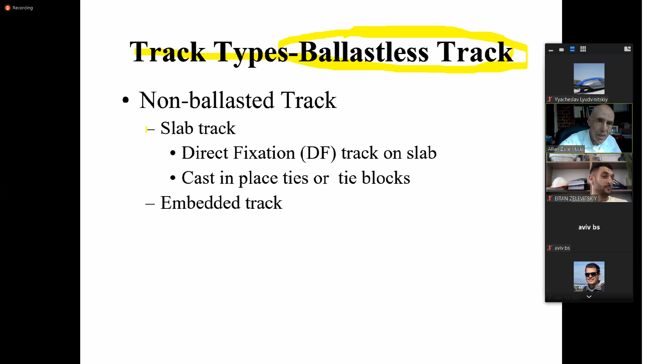The two major types of non-ballasted track are, in general, called slab track and embedded track. Slab track is usually made out of concrete slabs, either cast in place or continuously cast or precast and brought in. Embedded track is track that's laid usually in the street. All you have to do is go to Jerusalem and walk down Rehov Yafo, and you'll see lots and lots of embedded track. That's track that's built into the street itself.

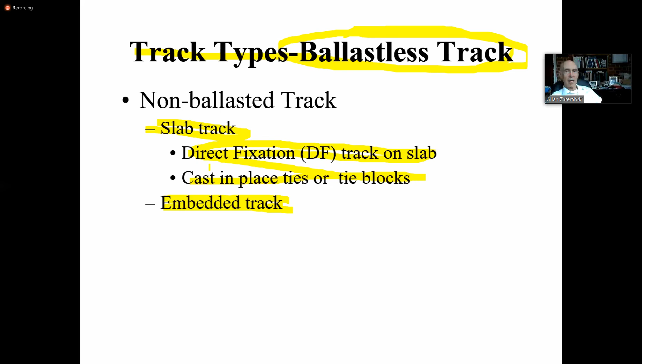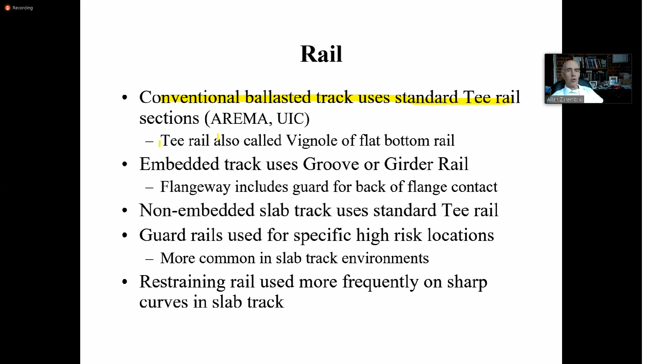Slab track can be further divided into what we call direct fixation track on slab and cast-in-place ties or tie blocks. And we'll talk about each of these in turn. So let's start off with the rail. Conventional ballasted track uses a standard T-rail section, which is also called a Vignoles or flat bottom rail. So Vignoles rail, flat bottom rail, T-rail, that's our standard rail section. That's self-supporting, has a stable base, has a single large head, and has a fairly significant bending moment of inertia.

Embedded track does use T-rail, and I will show you some embedded track that does, but they also use groove or girder rail, and you'll see both terms used. I'll show you a few more examples in a minute. The advantage of groove or girder rail is it comes with its own flangeway. The flangeway has a guard for back of wheel flange contact, so it doesn't go riding onto the street where embedded track lies.

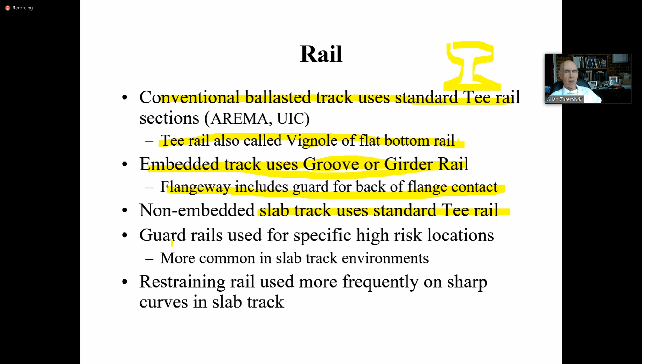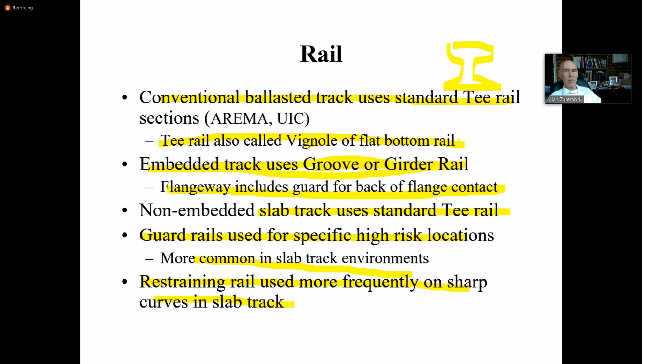Slab tracks always use T-rail. You really will not see groove or girder rail in slab track. In fact, the only place you're really going to see groove or girder rail is in embedded track. Guardrails and restraining rails, we've already spent some time talking about. You tend to see a lot of guardrails in slab track environments, and restraining rail in very sharp curves in slab track.

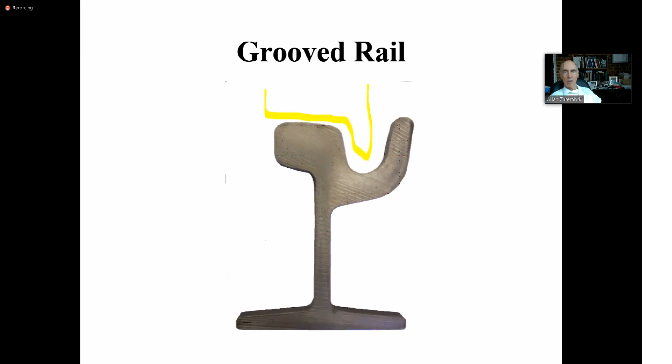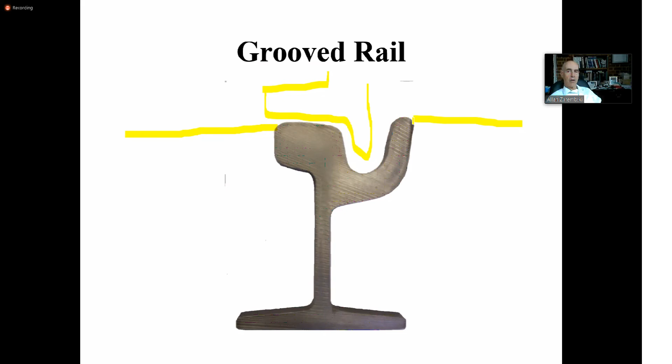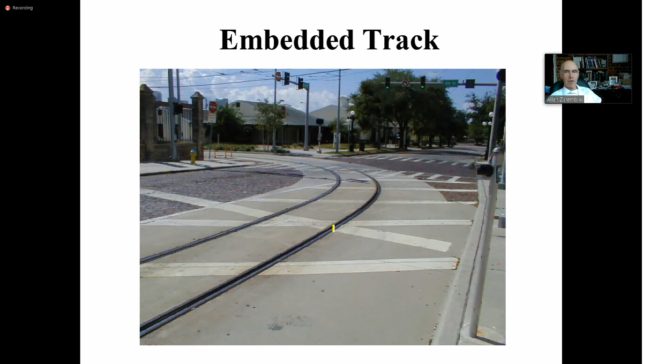So again, just as a reminder, this is a groove rail where the wheel sits there. This is most commonly used in embedded track of some form, where you can run the pavement of the street, be it paving blocks or asphalt or cement or whatever it is, to the back of the guard here and to the rail here. I've shown you pictures in the past of embedded track. These are fairly classical types of embedded track structures.

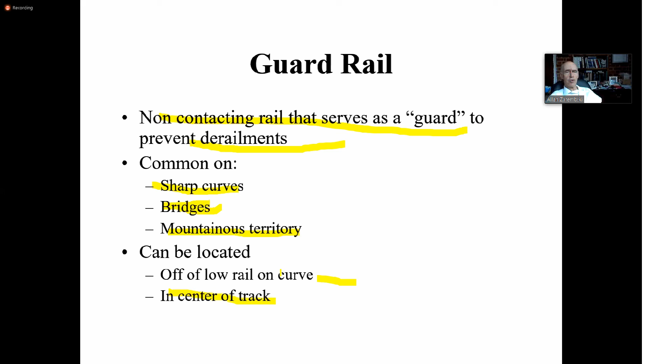You see them on sharp curves. You'll see them in mountainous territory. And more commonly, you see it located in the center of the track. Sometimes you'll see it off of the low side of the curve, in non-contact mode, but mostly you'll see it in the center of the track.

So restraining rail, again, is designed to be in contact with the wheel on the low side back here. We see it most commonly in transit tracks. I really haven't seen restraining rail in any serious major application on railway track, but where I see them is on metros, where you have very, very sharp curves, and that's where they're common.

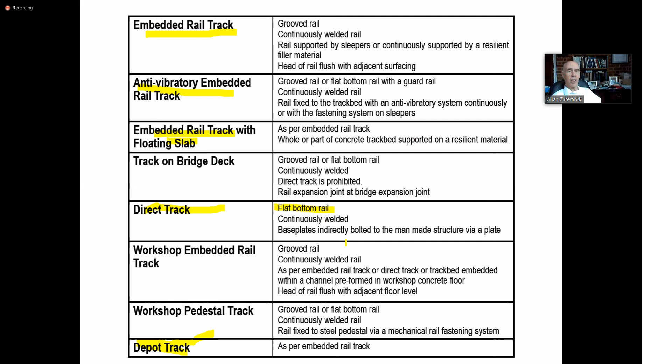In an embedded track, sorry, let me go back. In an embedded track, you actually get a little bit of that effect from the outside portion of the railhead, the guard portion of the railhead. So that actually can function as a form of restraining rail in very sharp curves, even though most of the time it's not in contact.

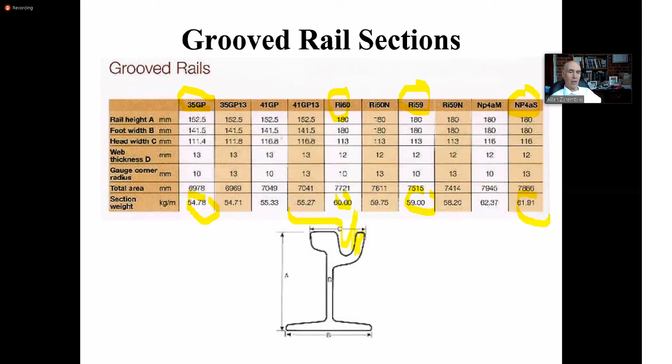In fact, you've got to be very careful with embedded track that you don't have excessive wear out here, because you have a very thin section. And if you have excessive wear in this portion of the girder rail, of the grooved rail, you can have yourself a little bit of a problem.

So as I indicated, it splits the lateral force between the outside and inside. It also introduces new wheel wear, because now you have wear on the outside of the wheel flange. So all of a sudden, now you're getting wear in this portion of the wheel flange as well, where normally you don't see wear. So you have to be really careful about getting excessive wear. Now you have wear on this side of the flange and on this side of the flange, and you can very quickly have excessive wheel flange wear.

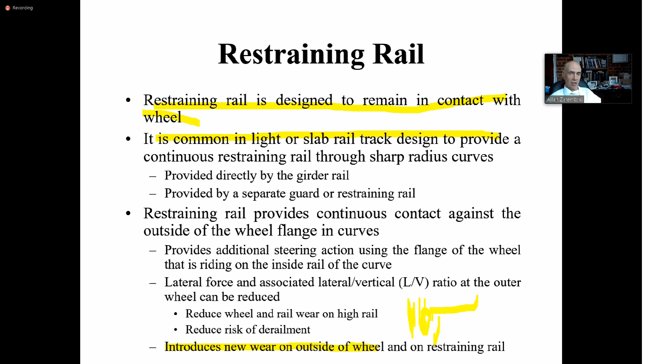And in general, in metros, thin flange is the most common reason for replacing wheels. When this flange gets excessively thin, below the allowable wheel standards, that's a major reason for either replacing or truing, machining the wheels to get a new profile back.

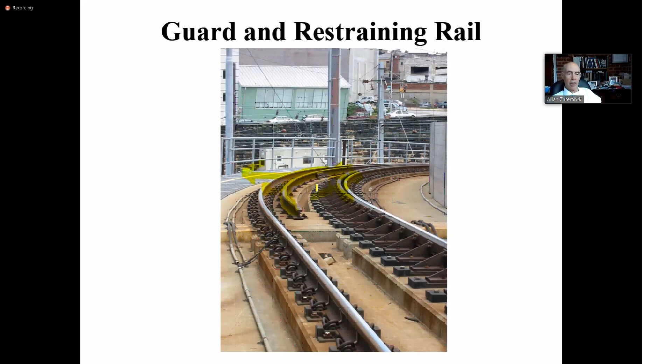Restraining rails come in various different designs. In this particular case, you actually have a modified running rail with braces holding it in place. Another design that you will see is a design such as this. Oops, sorry. This is my restraining rail. And again, you can see the concern about very high lateral forces. You can see how strong these braces are. And again, that's really a function of the concern about the level of lateral load.

So again, what we're looking at is the wheel sitting in here, and the back of the wheel coming up against the restraining rail.

Can I ask a question? Yes. About the distance between the restraining rail and the rail. You told me to see how I can calculate it in TCRP, and I didn't find it. Do you have any other source where I can find how to calculate it? Yeah, let me find another reference. I thought there were a couple of references in what I sent you. So let me get back to some references for you. Thank you.

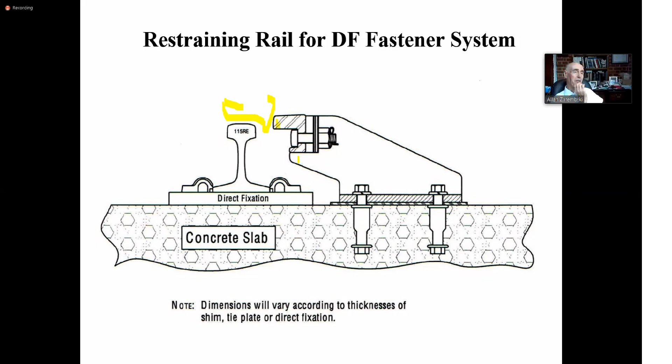Rena, if for some reason I forget, send me a gentle reminder. I'll try to remember. Because there's a lot of argument between the American engineers and European engineers about this distance. Yes. Yeah, there is some difference of opinion on how to do that. I agree.

Okay, so restraining rail is, as I said, used for very sharp curves. Standards differ, so you'll see different metros have different standards. I've seen standards for restraining rail for radii sharper than 365 meters, going down to very sharp radii less than 90 meters. So it really depends on the standards of the metro that you're working with. I think it's most common in the less than 200 meter radius range, but as I said, I've seen standards as much as 365 meters.

If the wheel flanges are relatively short, I've seen more application of restraining rail for short wheel flanges, because you have more protection against the wheel popping out when you have a large restraining rail in the background here.

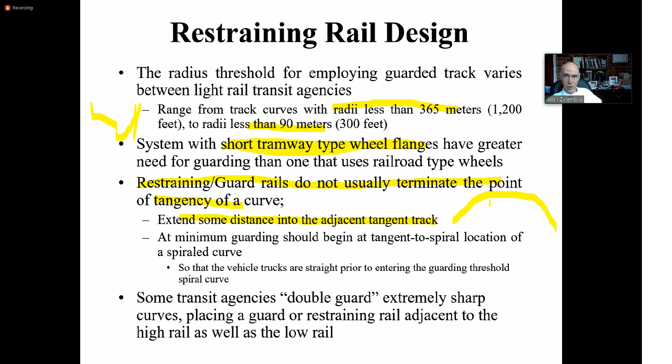Restraining rails usually go past the point of tangency and into an adjacent tangent track. So if you have a tangent spiral curve, we see restraining rail coming into the tangent as well. It just doesn't stop right there. And the reason for that is, as I've explained before, the transitions are actually where you see the largest lateral forces. So if you just focus on the body of the curve for your restraining rail, you can miss the worst case forces coming into or coming out of the transition between the tangent and the curve. So it's fairly common practice to run a restraining rail out into the adjacent track.

At the absolute minimum, to the tangent to spiral point. Going in is not so much of a problem, because nothing really starts happening until you go into the spiral. But coming out of the spiral is where you have some concerns, because if the bogie is rotated coming out of the spiral, it may need a little bit of tangent to straighten out, which means you can get some very high lateral forces even at the tangent on the outside of the transition. And so that's one of the reasons why you carry it into the tangent track.

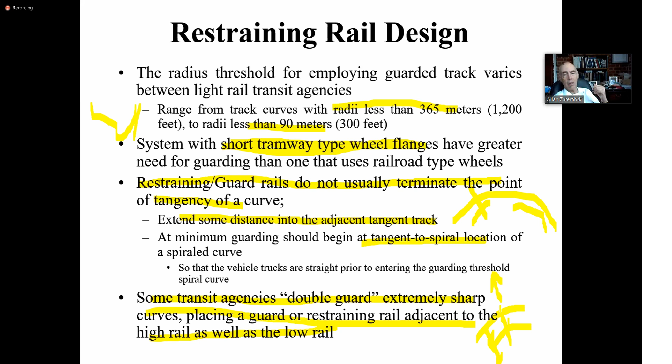So with very sharp curves, let's say less than 100-meter radius or something like that, I know of some transit agencies that put guards on both sides. I'm not that enthusiastic about that, but I do know you'll see that practice, and you'll see that in some standards.

Okay. So now let's go right into the track. I'm going to start off by talking about direct fixation track. Direct fixation track, which is the most common type of ballastless track worldwide, is a track structure where the rail is mounted on direct fixation fasteners that are attached to a concrete deck, slab, or invert.

And this is pretty much the standard method of construction for tracks on tunnels and aerial structures. And in fact, even in conventional railroads, we see a lot of this direct fixation track in tunnels, because if you want to put a deep ballast layer in a tunnel, you need a larger diameter tunnel, which gets to be very expensive from a construction point of view. So a slab track, a direct fixation track, usually requires a smaller diameter tunnel than does a ballasted track.

You'll also see some at-grade tracks. So, for example, the Chinese use a lot of direct fixation track on their high-speed rail. On the very high-speed lines, 350 kilometer per hour railroads, they do use a lot of this direct fixation track.

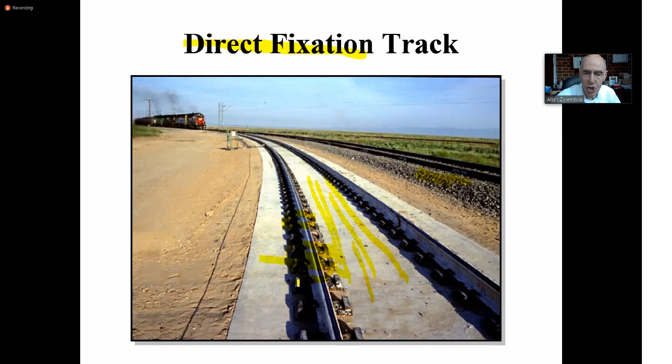I have been involved in the maintenance of direct fixation track often enough to know that components fail or degrade, and sooner or later you have to do adjustments. And so again, because we don't have adjustments in the slab, all my geometry adjustments go into my fastening system. And again, I'll show you that in a couple of minutes as well.

Here's another type of direct fixation track. Here again, you have a concrete slab with plinths put on top of it. We'll talk about all these designs in a few moments. And again, you can see the direct fixation fastener here. You can tell already this is a much more complex system than you have in a concrete sleeper or a wooden sleeper. And even though many of the clips are exactly the same, the rest of the system is much more expensive.

To put this in perspective, if you look at the cost of direct fixation fastening systems, they can be of the order of $100 to $200 per fastener.

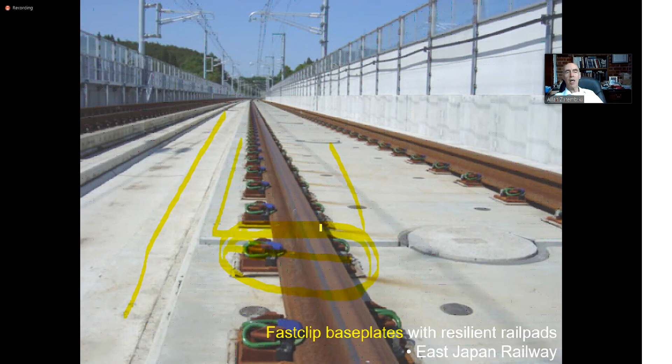Whereas the fastening systems for a concrete sleeper maybe runs $20, $25, and the fastening system for a wood sleeper maybe runs $10, $15 per fastener per side. The cost of a direct fixation fastening system is about $100 to $200 because of all that extra functionality that has to be built into that fastener, because there's nowhere else to put it, because you can't put it in the slab.

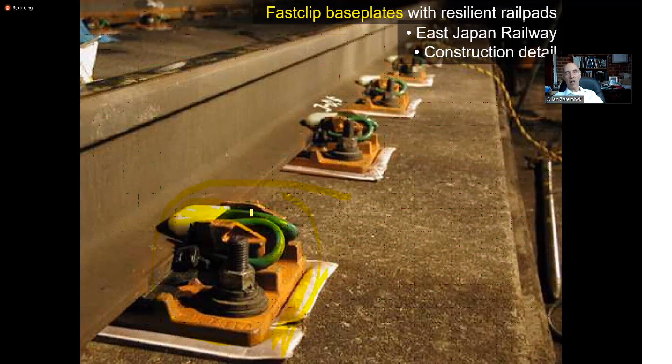Again, here's another view of a direct fixation fastening system. So here you can start seeing some of the major components. You can see there's a pad that's actually underneath the base plates. Here's your clip. This happens to be a Fastclip, which you'll also see with concrete sleepers. The insulator for this Fastclip is very similar to what you have for a concrete sleeper. Everything else is different. You have this very large base plate.

You can see there's the pads between the rail and the base plate. This is the plate hold down. So this looks like it's a bolt that was cast in place into the concrete insert, and then the plate put down, and then washers and nuts put down to hold this in place. Here's your shoulder for your clip. So again, you can see this is a much more complex type of configuration.

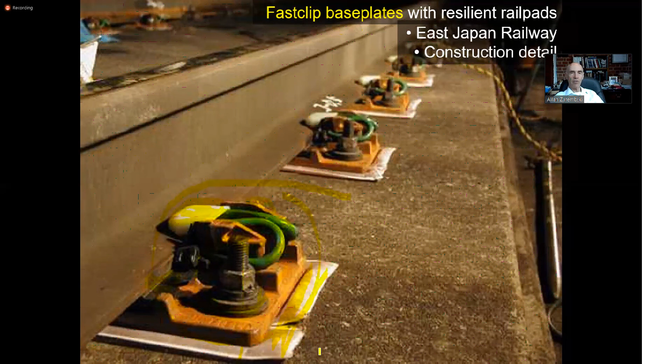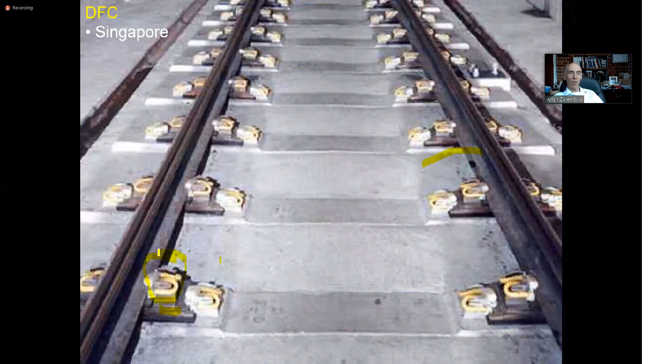So you have one elastic fastener holding the rail down, and you have a second elastic fastener holding the plate to the slab. And in fact, this particular configuration actually had the equivalent of concrete sleepers put in place, and then concrete poured in between, which was one of the techniques for manufacturing this type of a slab track.

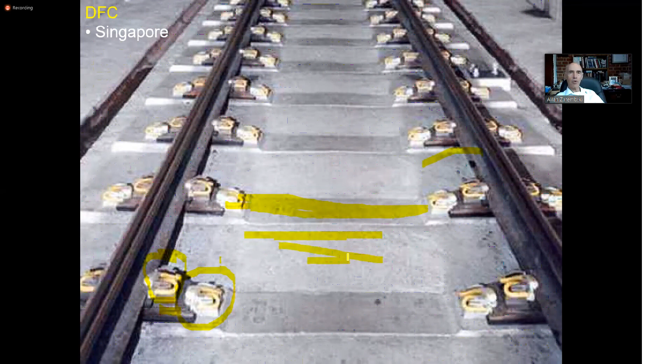Again, another type of fastening system. Here, if you look very closely, you see the serrated plate and this little top plate underneath the bolt. This, by the way, is the reverse of the other hold down fastener. This has a female insert that's cast in place in the concrete, and then this bolt comes down and is screwed into the insert. And then there's this top plate, the serrated top plate and the serrated bottom plate.

Anybody want to tell me what this plate's supposed to do? Oh, come on. Nobody want to tell me what the serrated plate is supposed to do? I just finished telling you there was no lateral adjustment on a concrete slab. So what does this do? This is my lateral adjustment. This, and I have one on the mating side.

By loosening the two bolts, I can actually slide this plate sideways, and I can keep my insert in here, but I have some movement here. It looks like I have the order of maybe ±8, ±10 millimeters that I can move laterally to give me lateral adjustment. This is one of several different techniques that are used for lateral adjustment of the

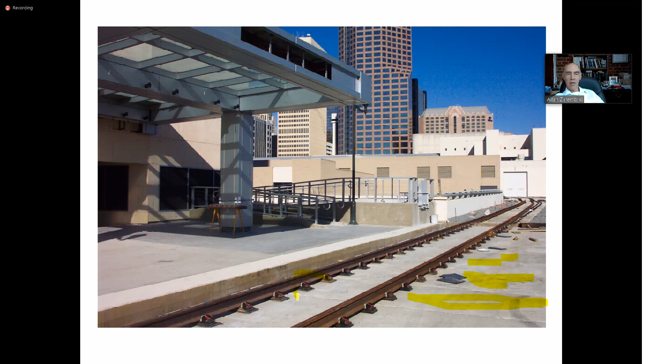This particular configuration, on an elevated metro structure, used precast slabs. So you can see the precast slabs that were brought in and placed over here, and again, these are our direct fixation fasteners providing all the functionality that we talked about.

So a typical direct fixation fastener, the most common type, actually consists of a separate top and bottom plate with a very thick elastomer in between. This elastomer can be of the order of anywhere from 12 to 20 plus millimeters in thickness. Actually, I've seen them as much as 25 millimeters in thickness. So you have a top plate, you have a slab, you have a bottom plate,

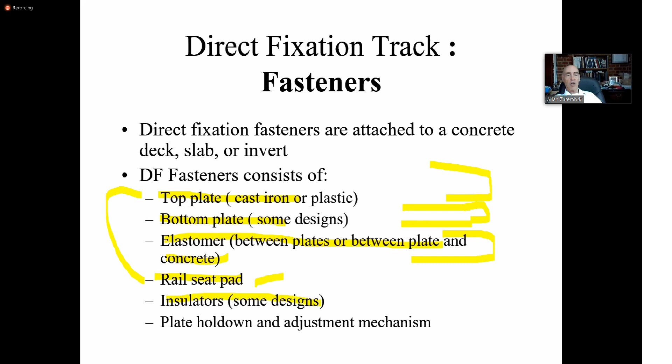and this very large elastomer is designed to provide you with all the resiliency that's missing in your slab and in your rail. In addition to that, you have a second, much thinner pad between the bottom of the rail and the top of the top plate. That serves multiple purposes, including providing electrical isolation and a wearing surface between the bottom of the rail and the top plate, which is usually cast iron, even though in some cases it can be plastic. Of course, you have the insulators, you have a clip, and then you have the plate hold down and adjustment mechanisms.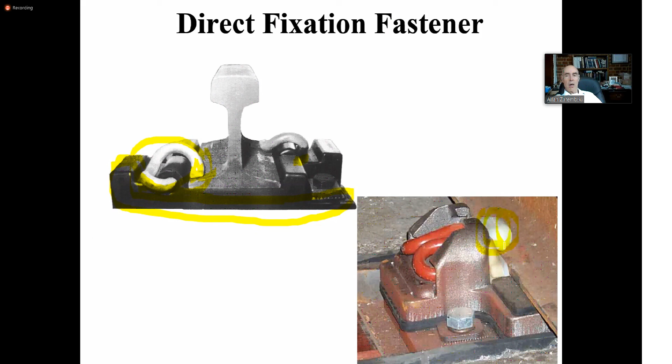In this particular design, the electrical isolation is in the direct fixation pad. You notice there's no insulators on the toe of this clip. So the electrical isolation comes from this top coating. Here, you see an external insulator on top of this clip. Again, you can see in both cases here, both of these use a serrated washer system to provide lateral adjustment.

Here you can see the one plate. Here you can see the separate plate. Actually, this is a good picture because you can see everything here. This is my top plate, which is a casting, a very expensive casting, as you can see from the complexity. It also has to provide all of the shoulders for the clip to make sure it provides proper toe loads to the clip. There's the pad between the rail and the top plate.

There's the pad between the top plate and the bottom plate. There's the bottom plate. And again, this has a female insert cast in the concrete. And then there's a bolt that comes down and goes into the female insert. And again, there's your lateral adjustment. Vertical adjustment is provided by shims.

So usually you have shims that go underneath the bottom plate. You would take off the bolt, insert shims and put them in there. So vertical adjustment is a bit of a complex exercise because of the shimming process, but that's usually how you do vertical adjustment. Gauge adjustment can likewise be accomplished by lateral adjustment of each individual plate, since you can move one rail with respect to the other rail, and that gives you adjustment of gauge.

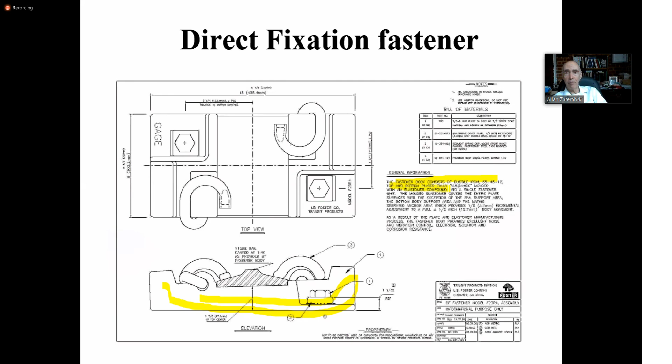Okay, here's just a different view. This is this plate that we're seeing over here. Again, this is actually an assembly system with a top and bottom one. You can see the fastener body consists of a ductile iron top and bottom plate that are fully vulcanized and molded with an elastomer compound in between. So what you're seeing here is the vulcanized coating on the outside of the combined top, bottom, and elastomer. So basically, this whole area here is vulcanized and coated together.

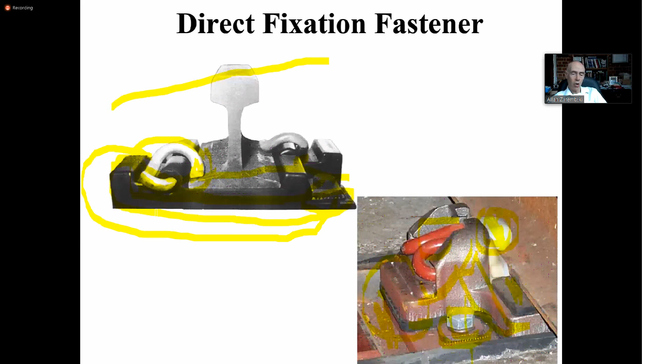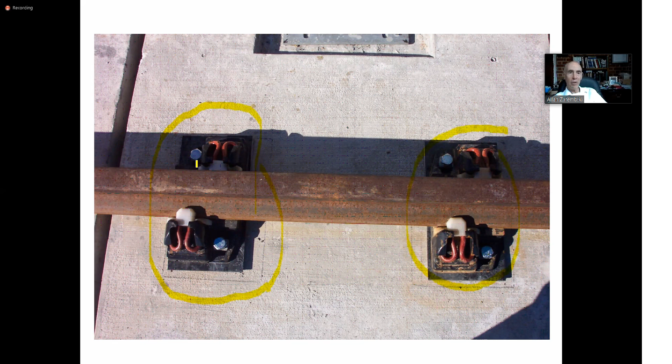Again, here's how you can see it installed in the track. So typically, in a single plate, you'll have 2 hold-down bolts, 2 clips, 2 insulators, ductile iron top plate, bottom plate with an elastomeric pad, everything bolted, both can be molded together, female inserts for the anchorage, shims for vertical adjustment, etc. What is ductile iron?

What is ductile iron? It's an iron. When you get into the metallurgical definitions of steel versus iron, it gets into really what is the percent carbon that you have, what's the percent of other components. Ductile iron is defined to be a steel-like metal that's on the border between iron and steel that has a high level of ductility. So ductility, remember the definition of ductility? We talked about it when we did fatigue.

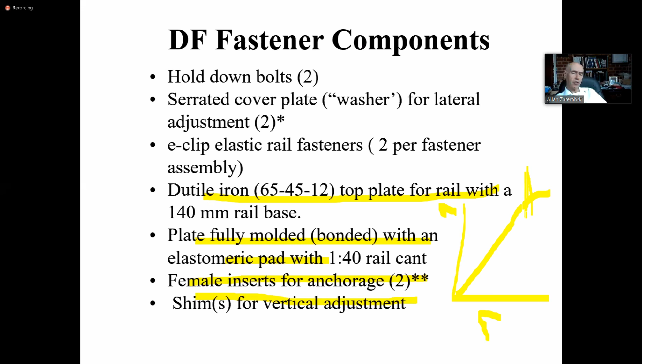If I take a sample and elongate it, so I do a stress strain diagram, I'm elastic up until the yield point, and then I'm plastic beyond that. So ductility is the amount of elongation I can tolerate. Typically, for most railroad applications, ductility is around 10%.

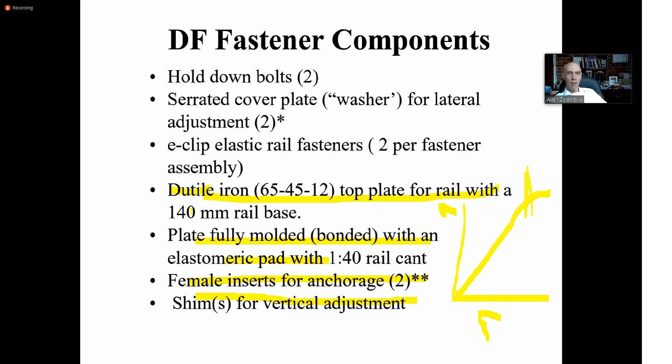So ductile iron is basically, oh, I'm sorry, there's a typo here. There's a C there, it should be ductile iron. I didn't see that before. Did I answer your question? Ductile, okay. Yeah, ductile iron, sorry. I didn't realize I was missing the C there. Okay, so

because of this very significant requirement for the direct fixation fasteners, because they have so much functionality, the specifications and the testing of direct fixation fasteners are really fairly sophisticated and fairly complex. So this is an example of a spec that I took from one direct fixation fastening system that's used in metro systems, just to give you an idea of what kind of fastener characteristics and testing you need.

So you can see there's a vertical stiffness of about 23 to 28 kilonewtons per millimeter. You notice this is kilonewtons per millimeter, not kilonewtons per millimeter squared. This is a classical spring.

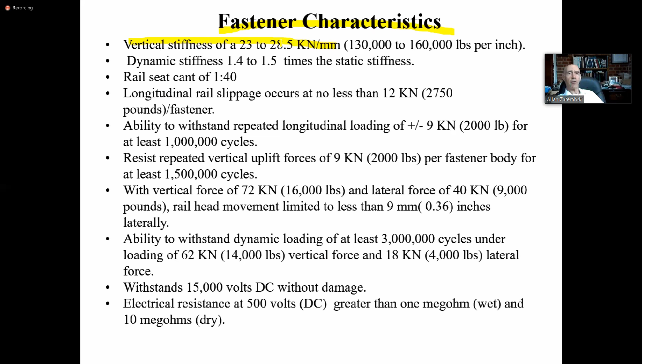This is really, really important because some of the earlier design pads were much stiffer, some of them of the order of 50 to 70 kilonewtons per millimeter, which turned out to be way, way too stiff and generated much too stiff a track structure. So the stiffness becomes really important. This vertical stiffness is basically a quasi-static stiffness, which means you apply the load at low speeds. Your rate of loading is relatively low.

Many of the new generation fastening systems also specify a dynamic stiffness, where you measure the stiffness under a very rapid dynamic loading, very high rate of loading. And the dynamic stiffness is usually about 1.5 times the static stiffness. So for example, if my static stiffness is 24 kilonewtons per millimeter, my dynamic stiffness would be about 36 kilonewtons per millimeter.

The rail cant, I forgot to mention it, but of course the rail cant is built into the plate. Let me see if I can show that here. Here you can see it right there. You can see the rail cant is built into the plate. Again, it's virtually impossible to accurately put a rail cant into a concrete pour. So again, you build that into the direct fixation fastening system.

Longitudinal rail slip, that's really a function of longitudinal fastener strength. So that's of the order of about 12 kilonewtons per fastener for this particular case. Repeated longitudinal loading and repeated dynamic vertical loading. So these are really, I'm going to say fatigue testing, but they're really repeated load testing. So you can see in this particular case they specify plus or minus 9 kilonewtons for 1,000,000 cycles longitudinally, in the direction of the rail. So we're looking at the longitudinal restraint of the clips in this particular case.

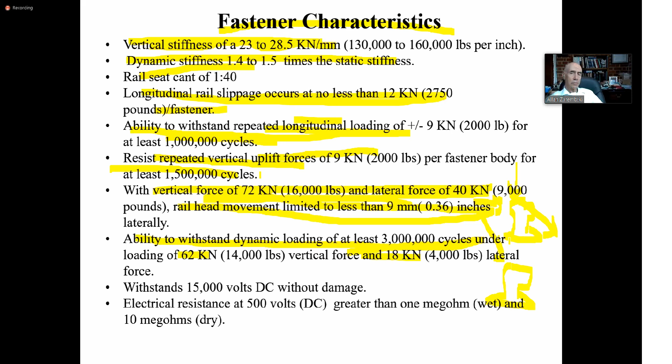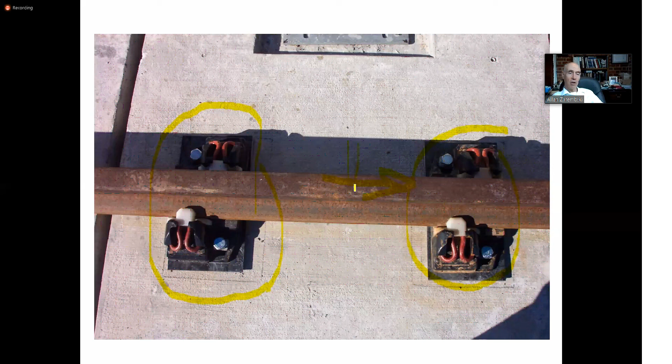Electrical resistance check. Well, first of all, the first check is actually a current check, because remember, if you're dealing with a metro system, this is the third rail return. This is the power return for your traction power. So 15,000 volts DC. Again, it depends what your traction power configuration is. This was a DC system, so they did a 15,000 volt DC test. And then the actual electrical resistance, 500 volts DC, greater than 1 megaohm when the system is wet and 10 megaohms when dry. So here you'll be testing both under wet and dry conditions.

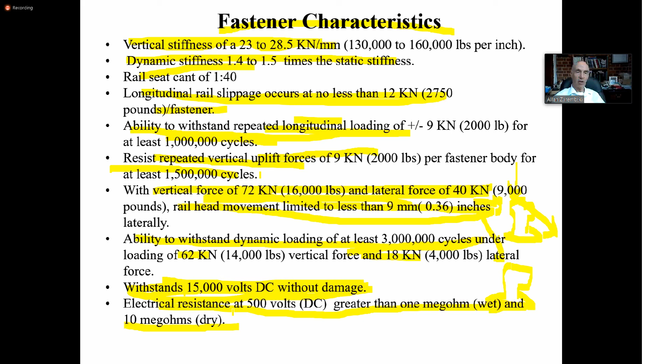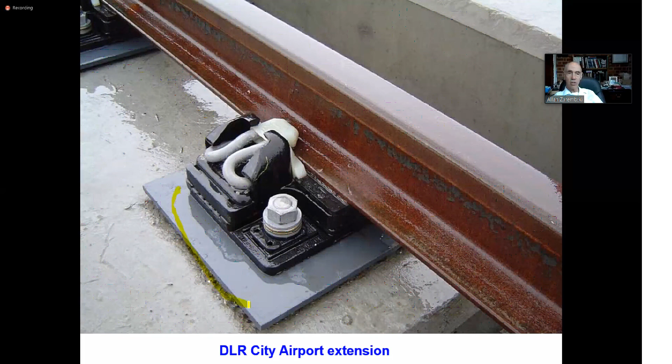So you can see the testing is actually fairly serious and fairly significant here. Again, just another variation of the design. You can see here there's a bottom steel plate just to add to the complexity. So I have a top plate, I have an interim plate. This is my top plate up here. I have an elastomer in here. I have a bottom plate over here, and then I have another steel plate on the bottom over here. So the variations of this are, I'm not going to say infinite, but there are a lot of them.

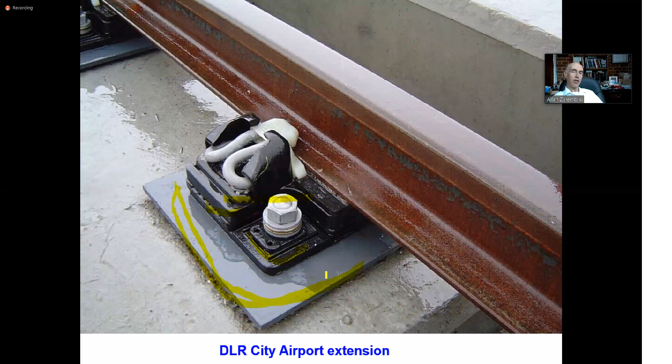Okay. Now, given the sophistication of these fastening systems and their ability to attenuate dynamic loading vertically, they generally have poor to medium noise and vibration attenuation characteristics. So where you have noise and vibration sensitive zones, it becomes an issue. For example, when I was working on Tel Aviv Metro in the early stages, I actually helped them do a survey of noise and vibration sensitive areas.

So it turns out that the Metro came near some concert halls, it came near some laboratories, it came near synagogues, and in fact, one of the extensions, not the red line, I forget which one, was going through a big hospital complex. It was actually coming right next to the CAT scan and MRI units, and they were extremely concerned about vibration affecting the CAT scan and MRI units of the hospital.

So again, where the traditional noise and vibration performance of traditional DF fasteners is not adequate, there is a secondary set of noise and vibration fasteners designed just for control. So there are two types. I'm going to show you a picture of those. This is the most common one. This used to be called the Cologne egg because it was developed in the city of Cologne and later became so widespread that they just called it an egg type fastener.

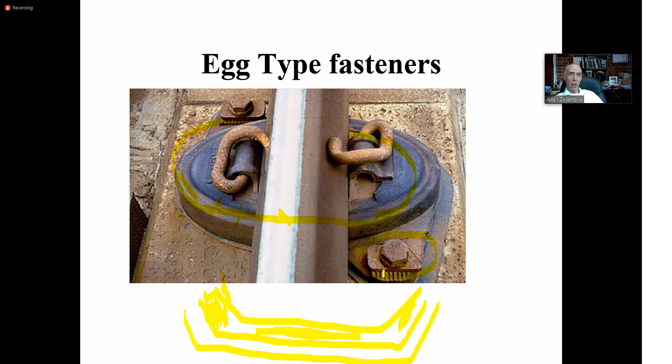By the way, take a look at the serrations here. You get a very nice view of the serrations here as well. So that's one type. That's the one where you use a shear element to do that. The other one is actually a fairly interesting design, relatively new, and becoming really quite popular in recent times. And this is one where the fastener does not touch the base of the rail at all.

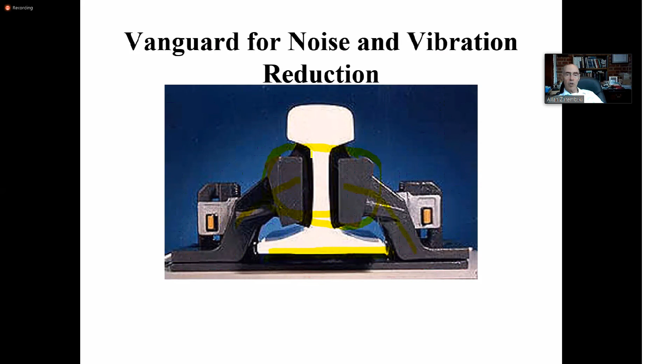Let me see if I get a better picture. Here we go. So if we look at it from this configuration, you notice the fastener is not touching the base of the rail. The rail is sitting on an elastomeric pad over here, but there's no downward pressure from the fastening system. And in fact, the rail is supported primarily by the fastening system in the web of the rail. You can see there's an elastomeric element here, and this is steel over here. And the rail is supported by this elastomeric element over there. Not 100%, but 90% or so.

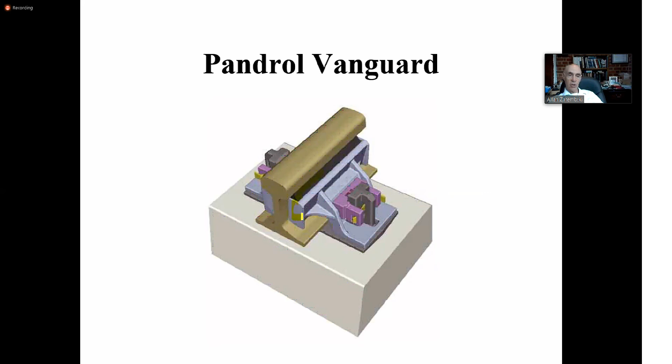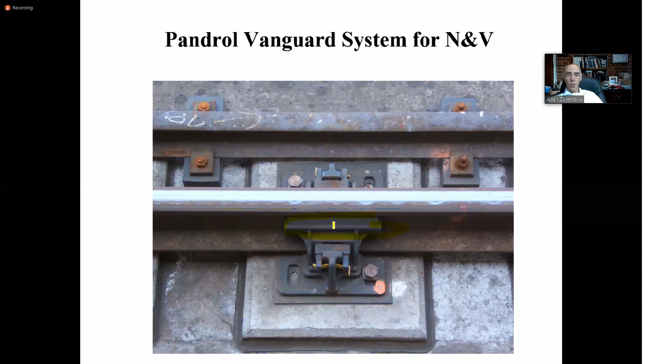You can see it here in conceptual. There's that elastomer. It's actually a cast iron, not a steel. It's a cast iron top plate, and the base is really hanging up there. So this is an example of it in the field. And again, you can see the rail is really supported completely on the web of the rail.

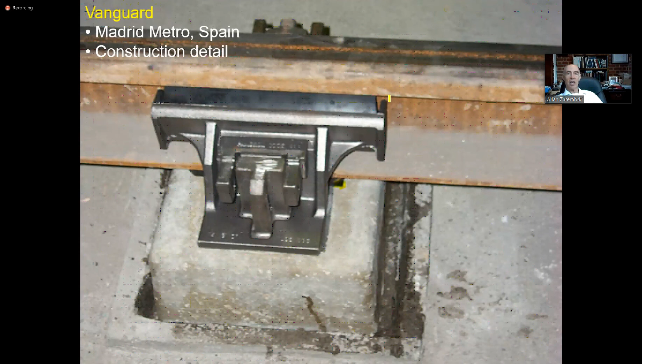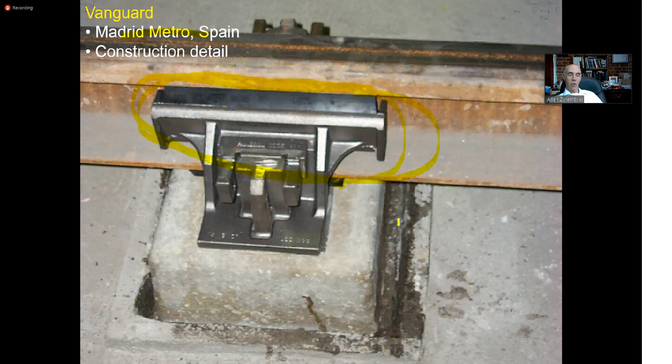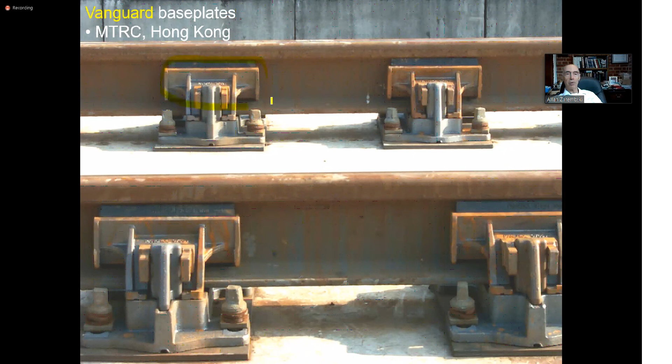Another example, here you can see there's a little pad underneath the base of the rail, but that's just designed in case there's some load that slips through. But most of this is designed through here. This was actually in Madrid, where they're applying this Pandrol Vanguard system. Hong Kong is using it as well. Again, you can see the configuration here. I'm not sure there's even a pad underneath the base of the rail in the Hong Kong configuration. I think the rail is completely isolated and completely supported up here.

We also have direct fixation fasteners for special track work, which become much more complex. So when I said a regular direct fixation fastener costs between $100 and $200, a direct fixation fastener for special track work costs between $200 and $400.

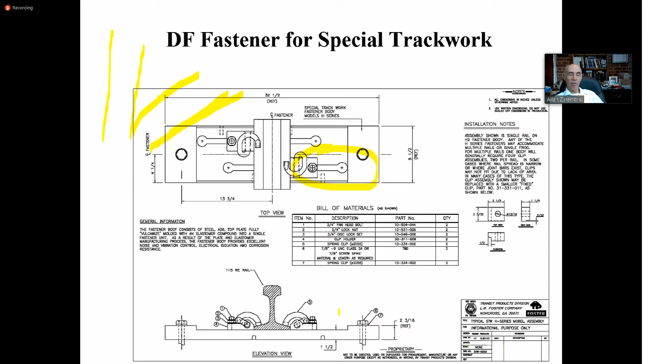Extremely expensive, because you notice this has to provide for the variation in the location of the fastener as you go through the switch. So if you remember on the diverging regular switch, the position of my fastener, my angle, my orientation, my position is changing. And I have to have this kind of adjustment built into the direct fixation fastener for special track work.

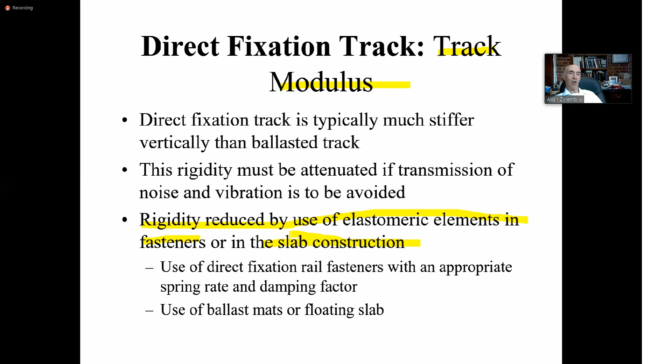Okay, now when we get to the subject of track modulus from our beam on elastic foundation analysis, among other things, obviously a concrete slab track is much stiffer than a ballasted track. And even with the presence of the elastomeric elements, we're still dealing with a very high level of rigidity. The elastomeric elements in the fastening systems do something, but sometimes we actually have to introduce elastomeric elements into the slab construction as well.

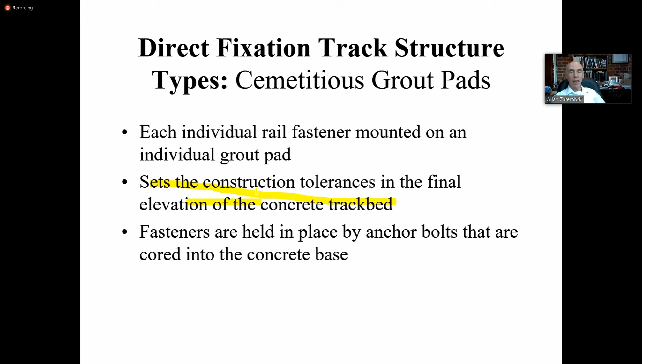So in this configuration, each fastener has its own grout pad, and the construction tolerances are really set in the grout pad itself. So you can have a little bit rougher construction tolerances for the concrete slab, and then you have the final tolerances in the grout pad. And then the fasteners are held into place by the anchor bolts. The anchor bolts go all the way down into the base concrete pad. There's no reinforcing steel in these grout pads, but the anchor bolts do go all the way down into the slab itself.

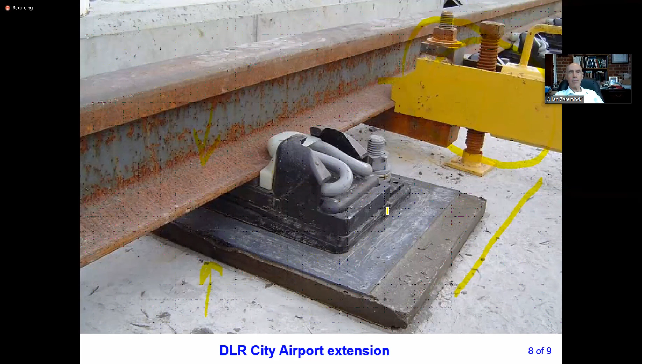I'm starting to see more top down type of construction being used around the world, because it's actually a little bit more accurate. You can hold your tolerances a little bit finer when you use a fixture to hold your rail and fastening system exactly in location, and then you can pour your grout pad accurately between the bottom of the DF fastener and the top of your slab.

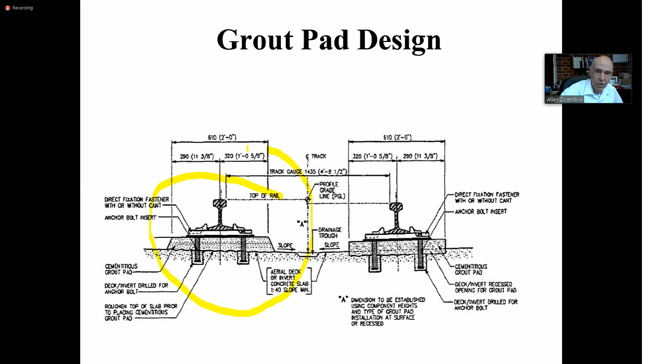Okay, hold on a second. In the interest of time, I'm not going to go through the details of how you design and pour your grout pads. Again, you can see here real quickly, the fasteners go down through the grout pads, and there's some discussion here that I'm just going to skip in the interest of time.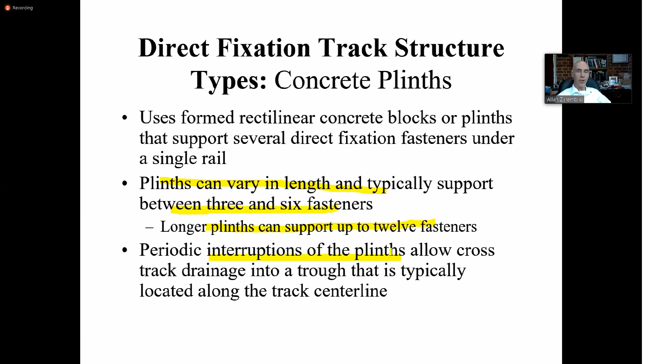And then you want to have your interruptions in the plinth to give you cross drainage. So you can see your drainage. You can actually see your drainage mechanisms through here in your cross drains.

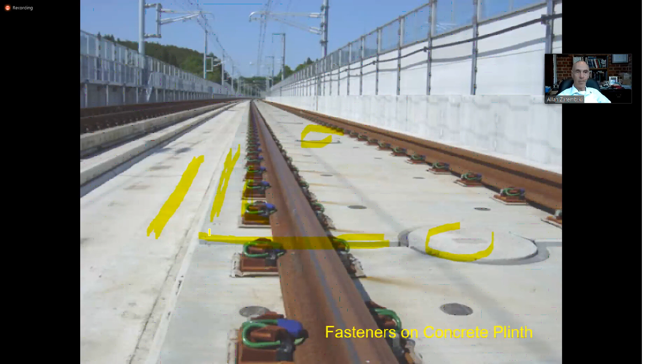There's another view. This is an egg type of fastener for noise and vibration reduction. And this is my running rail. And you can see my concrete plinth. Now the concrete plinth is usually reinforced, but not pre-stressed. So you use reinforcing steel bars in the manufacture, and then you put your fastening.

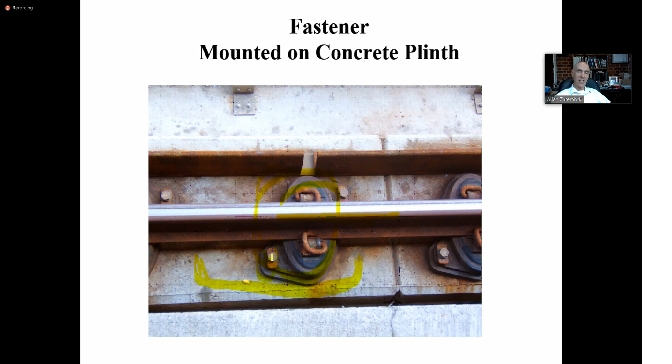Your fastening now doesn't have to go all the way through into the slab, depending on the size of your track. So here's an example of two different configurations. In this particular case, the fasteners do not go into the slab. They just stay in the plinth. Again, you see the reinforcing steel in the plinth.

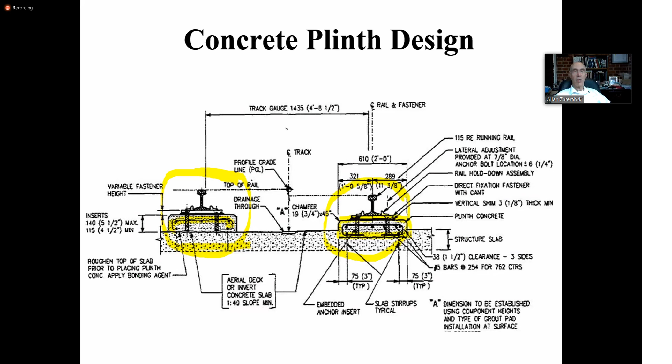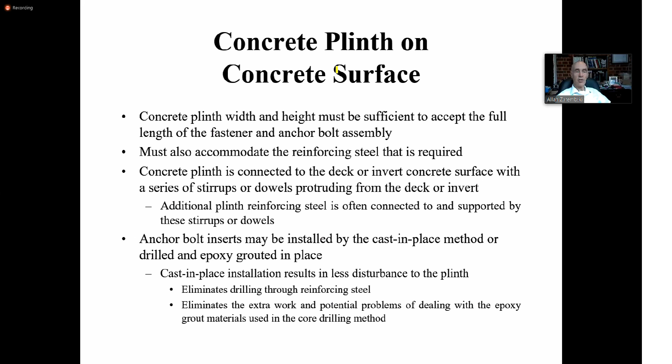In this particular configuration, the fastening systems do go into the slab. Actually, the plinth in this particular case is cast partially embedded into the slab itself. So again, you see the different types of design. Okay, again, I'm not going to go into the details. You can read them on their own. How do you epoxy in place? A lot of these are either cast in place or installed after the fact.

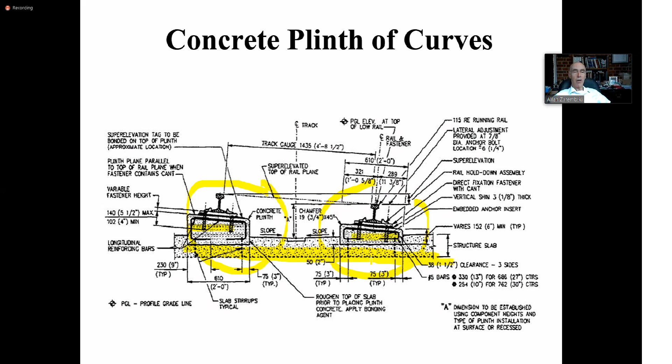On curves, of course, this is where your elevation has to come in. So it's a lot easier to put the elevation in the plinth than to try to put the elevation into your concrete slab. Trying to put the elevation into the concrete slab is much, much more difficult. There are places where it's done, but putting it into the plinth gives you a little bit more flexibility in terms of manufacturing.

If you have guardrails or restraining rails, then you need an extra wide plinth. Here's a restraining rail on the low rail. And again, you can see we have an extra wide plinth on the bottom with the bolts holding down both the restraining rail braces and the fastening system itself.

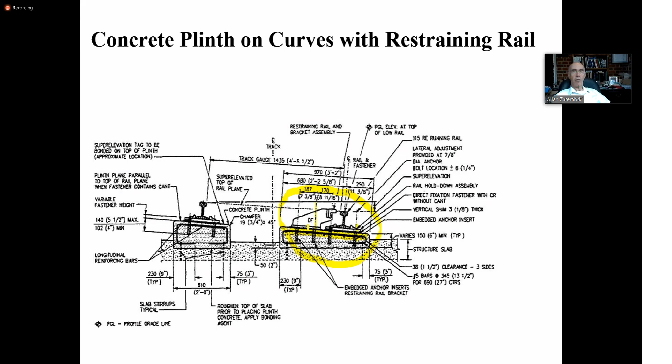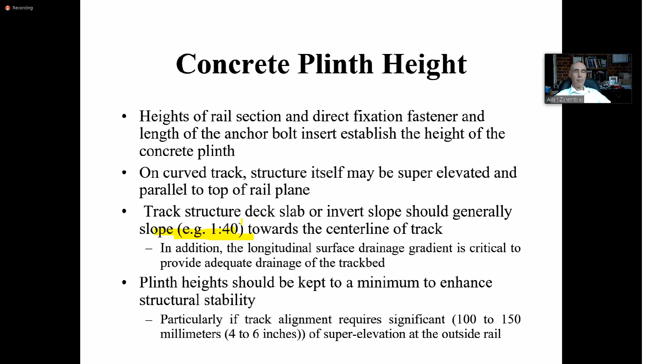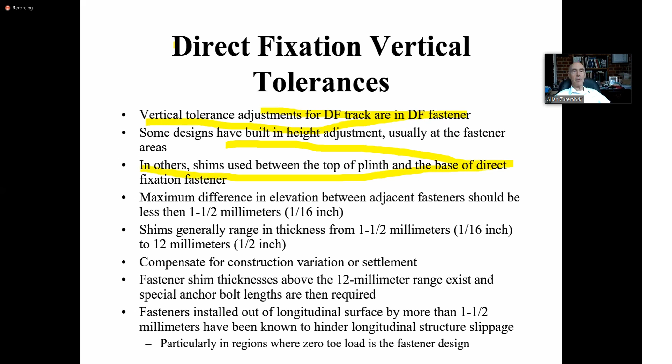Okay, and again, the cant is built into the plinth, but generally speaking, you want to have a cant in your slab for drainage as well. Again, I'll let you read on your own for tolerances, but as I mentioned before, the vertical tolerance adjustments for the DF track usually use shims. That's the most common technique. I have seen some fasteners with vertical height adjustment, but they're very rare. They're very difficult. They don't work very well. Most people I know use shims.

And so if you're using shims, you've got to be really careful about the maximum difference in elevation between adjacent fasteners, because you don't want to have a ridiculous amount of shims in there. When SEPTA in Philadelphia built one of their elevated tracks with slab, it was called the Market Frankford Elevated. They built that about 15 years ago. They completely rebuilt that with a slab track and plinths design, and they had a major problem with maintaining vertical tolerances.

The contractor did not do a good job in vertical tolerances, and so they had some fairly significant tolerance issues, in the range of about 3 to 5 millimeters between adjacent fasteners. And what was happening is that the elastic fasteners they were using, which were a Vossloh fastener, were failing in fatigue very, very early on. I'm talking within the first year of service.

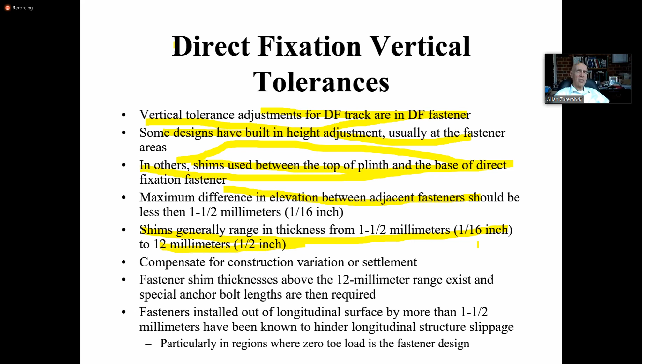And so they actually had 55-gallon drums on the deck of the track, where they just used to throw the broken fasteners, and come in every couple of weeks and replace them, until they finally had to come back and do a complete redesign of the entire structure because it was intolerable. So again, shims in the range of 1.5 to 12 millimeters; 12 is a little bit thick for shims. 1.5, 3, maybe 5 or 6 millimeter shims are more commonly used.

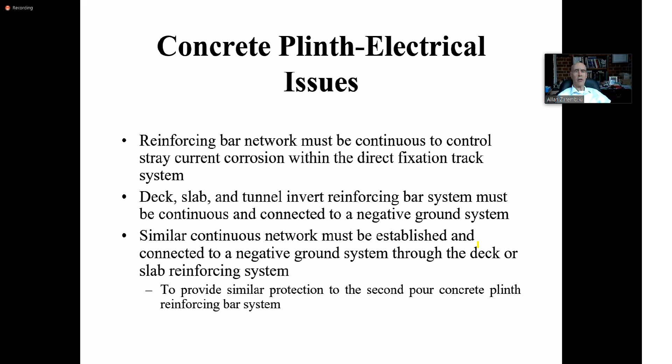You've got to be careful of electrical issues with your reinforcing in your plinths, because you have to make sure everything is connected to a negative ground. Otherwise, you have problems with corrosion, and very quickly you can have stray current corrosion and failure in the reinforcing bars.

Okay. Let's take a few-minute break right now. I think we're running a little past my normal break time. So let's take a break and we'll continue. Let's take 15 minutes and we'll continue in 15 minutes.